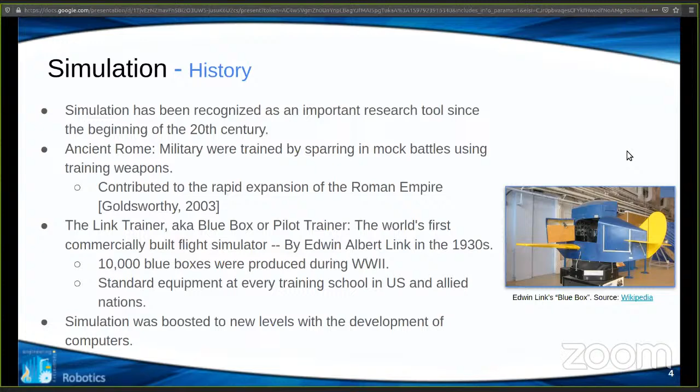Simulation was boosted to new levels with the development of computers. First the analog computers, and later the digital computers, have boosted simulation to new levels, and we will see what we can achieve with simulation nowadays.

If you want a formal definition of simulation in the context of robotics, this is one good definition: it is the process of designing a model of an actual or theoretical physical system, executing the model, and analyzing the execution output.

Simulation is very common in our lives. For example, to understand reality and all of its complexity, we try to build artificial objects and dynamically act out roles with them. I am sure all of us have come across simulation very early, namely playing a game in our youth, for example being a parent, or playing with your siblings as a doctor, fireman, etc. It's just a simulation where a child is playing a role in a virtual environment with toys.

The principle of learning is essential in simulation. Using simulation, we can learn about something in a very effective way, and while modifying rules, we can observe the effects of our interaction. Simulation opens a wide range of options for solving many problems creatively.

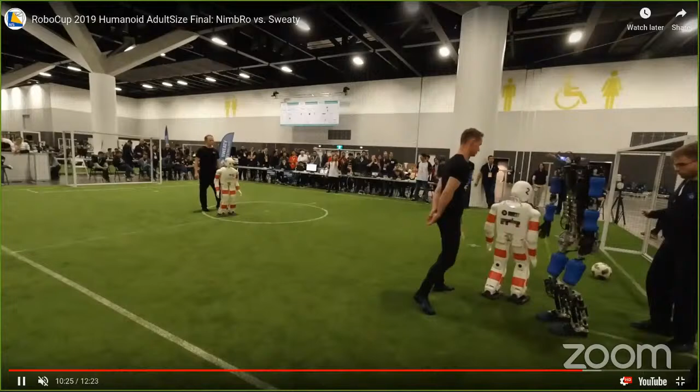The way I'm saying it seems very easy, but it is not. In reality, it's very complex, and it requires lots of things in the background. And I believe the score is for this match here. So let's take a look at this one, let's wait to see. Yeah, here we go, 7-0 for NimbRo.

Okay, so we are using humanoids in RoboCup, and I believe anybody can participate in the RoboCup competition. You just need to build a team and work together. And of course, you have to travel to the places where the RoboCup competition is held. But I'm not sure what is going to happen in 2020—maybe everything will be online or in the cloud.

Need to wait. The second section I will be talking about when it comes to robotics is mobile robotics. This is a complex research area in which many advanced technologies and open research issues are combined all together. It is often difficult to master perfectly every technology, and hence realistic simulations and fast prototyping of mobile robots help reduce the amount of time and hardware spent in developing mobile robotics applications. Moreover, simulation tools allow researchers and students to focus on the most interesting parts of their robotics projects to achieve more advanced results.

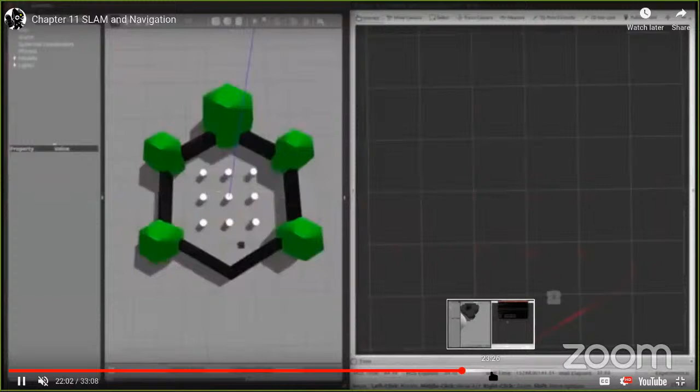For example, you can use SLAM, simultaneous localization and mapping. SLAM is a way to build a map of the environment using localization, like AMCL, and also laser data. This is done in simulation where you send a robot that is going to scan or map this area using laser data. You can see the laser data here in red.

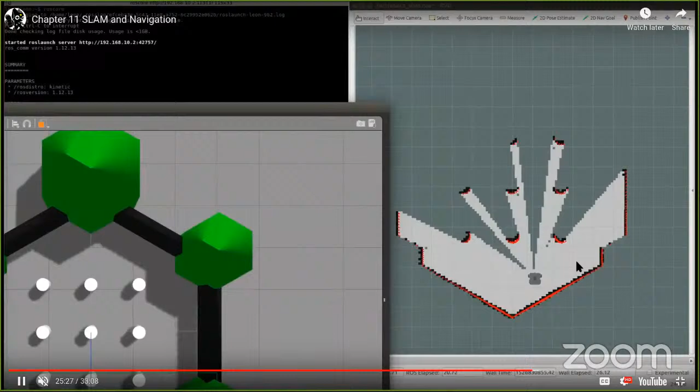I'm not sure if you'll be able to see it from where you are, but the red dots here are the laser data detecting objects. The white parts are available areas, and the black ones are obstacles, for example.

So you send a robot in an environment like this. Imagine you send a robot like this into a real environment - it will build a map of the environment. Afterwards, you can send your robot to navigate the environment to look for people. Mapping is part of the simulation, one aspect of simulation that we use a lot not only for looking for or rescuing people, but in some other areas too.

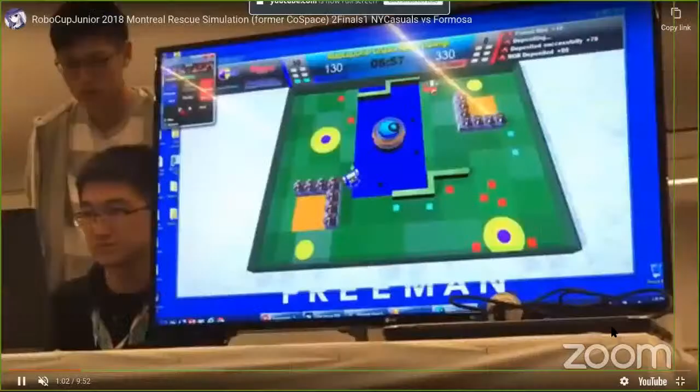This one is, I guess, a little bit more interesting for the youngsters out there. This is also the Rescue League, but it's the Junior League, I think. Again, you have to rescue people, but in a more fun way for kids to learn how to use robots and how to program robots effectively. I guess it's a little bit more attractive to the youngsters.

Okay, so the other field is medical robotics. The introduction of simulation into robotic surgery is recent and advancing quickly. This has created the need to identify systems that effectively improve these unique surgical skills.

The modeling of deformable organs - you can work on a person's heart, for example, or lungs. These are deformable organs; when you push on them, they will deform. So the modeling, planning, and simulation of robotic procedures, safe and real-time integration with augmented reality - this is also one aspect of robotics we use. All of these are key topics in the field of robot-assisted surgery.

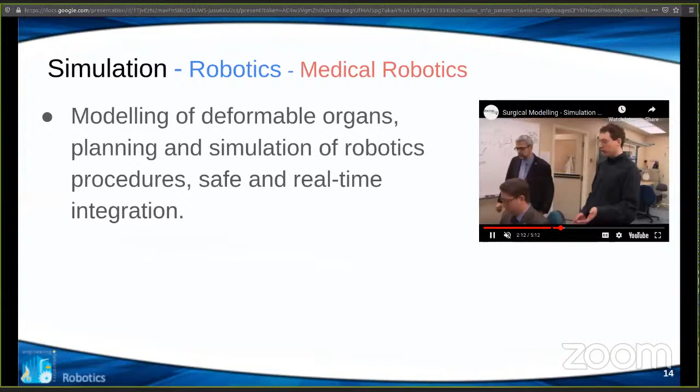Just a quick... trying to find the right spot where it shows simulation with robotics. So basically, this is a way to do something in simulation and try something new in simulation and see how it goes. And if everything works fine, you can get some data out of this and try to implement it yourself in a real situation. So robotics, or simulation, allows you to break things without actually breaking physical things. So it's fine to break things in simulation.

And of course, we have industrial robotics. Without simulation, we won't be able to do much in industrial robotics. When it's time to program an industrial robot on the production line, your robot is doing something like picking, I don't know, some boxes on the production line. The shift is over and you want to reprogram the robot to do something else, like picking up apples, instead of picking up boxes, from a conveyor belt, for example.

Well, if you want to reprogram the robot this way, you usually have to stop the production line. And this downtime can cost upwards of thousands of dollars. And this is where offline programming comes in.

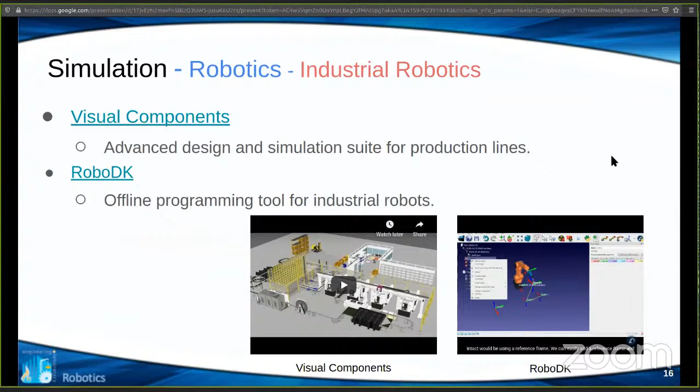And simulation is a good way to test these new languages that you are moving to your robots. At work, we have something called CRCL, the Canonical Robot Command Language, which is a tool that brings this together: you write the program in one language, and CRCL will be able to translate the language you use to the robot's language. You have to do the mapping only once, and then you can use it whenever you want. This will save time, and you can do testing in simulation as well, pretty easily.

Okay, 2 more before we move to ARIAC. I guess I'm running a little late. The next one is Robot Studio, a development suite created by ABB, and I'm not sure this is free.

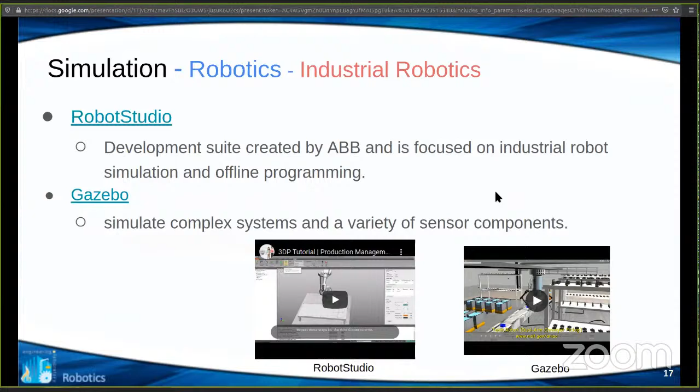The last one is Gazebo. Gazebo is the one we use in ARIAC, and we're going to move to ARIAC right now. Gazebo is free and has full integration with ROS.

All right, so we are in the second part of this presentation, and I will talk about ARIAC, which stands for Agile Robotics for Industrial Automation Competition. We usually say ARIAC competition, but it's redundant because the C in ARIAC stands for competition, but just saying ARIAC seems weird, so we say ARIAC competition anyway.

So the goal of ARIAC is to test the agility of industrial robot systems. We'll see what agility means in a minute. The goal is enabling industrial robots on the shop floor to be more productive, more autonomous, and to require less time from shop floor workers.

We were approached by small and medium manufacturers in the US who are struggling with some aspects of robotics. They need a way to test that the robot will be able to do some robotics application. They need a way to see the challenges and see if their robots can handle those challenges. I guess the best way to do this is using a competition or simulation, and this is what we did at NIST.

ARIAC is a simulation-based competition, so everybody can access this competition. It's free.

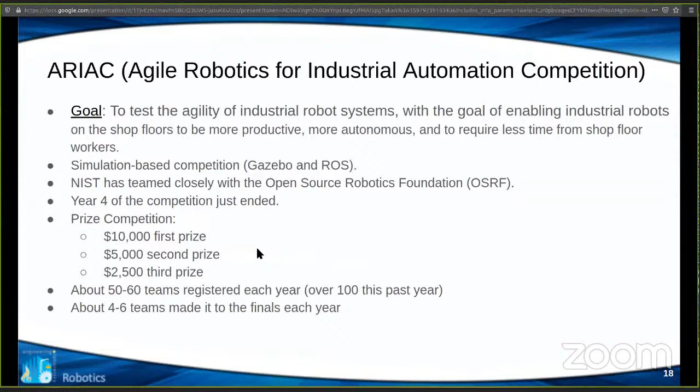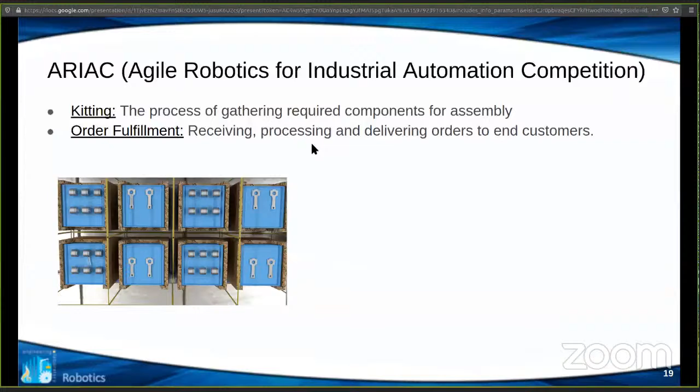ARIAC comes with agility challenges. We originally identified 30 agility challenges - things that companies struggle with in their robotic applications. There were 30 of them. We talked with industry and did literature reviews to understand all those challenges.

Then what we did is rank each challenge based upon 3 criteria. The first one is industry's perception of how critical the challenge is - you ask industry which challenges they want us to look at, which ones are very important to them. The second criteria is how difficult the challenge is based upon perceived team capabilities - that would be the people competing in ARIAC.

You should also ask them if they think it's easy to implement a solution for those challenges - you need their feedback as well. The third criterion is how difficult it is to implement in Gazebo. We need to take into account all 3 things and find a sweet spot between them, and then you can implement them in simulation.

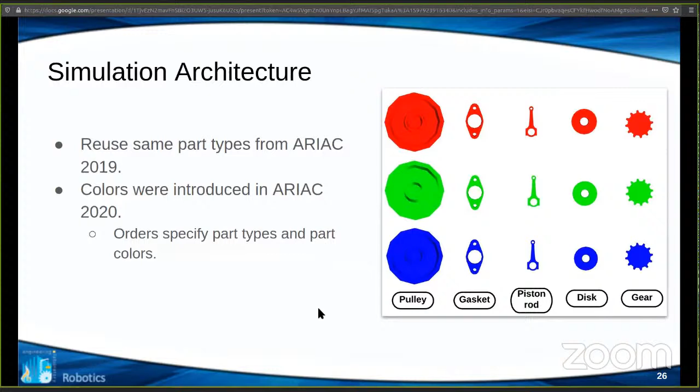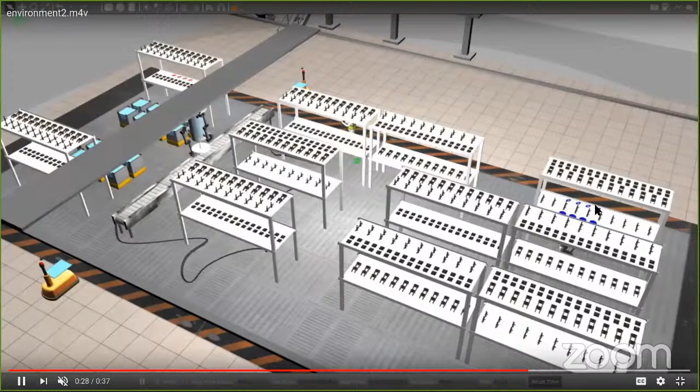If you want a quick overview of what is happening in the work cell, you have people moving, the robot is here, an AGV is here, another AGV is here, you have bins, you have shelves. I don't know if you can see here, but we have some blue parts on the shelf here and some red parts here. It's not a very beautiful environment, but it's quite complex, has many factors, many components, and you need to navigate through them.

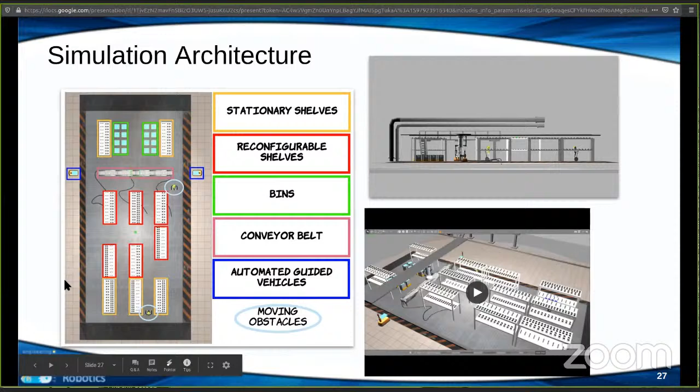The simulation architecture we use is a Gazebo environment for Agile Robotics, which we call GEAR.

We have plugins. You have a plugin to deliver tray, a plugin to control the cycle of the parts on the conveyor, for example, and control how we move parts. All the challenges are controlled by plugins.

Teams' interaction with the ARIAC server was via the GEAR interface. This is basically a ROS-based interface, so we provide ROS services and messages so you can communicate with the system. For example, you can send the AGV away when it's ready, you can query orders to know which order to build, and you can query or get information about sensors using services. All of those are available to you; you just need to know how to use them.

A quick overview of the simulation architecture. As a participant, you provide a file with the sensors to be placed in the environment, and we parse this file for you. Then we parse another file, which is basically the challenges for the competition, defining where to put parts in the environment, where people are moving, and all of this. Then everything happens on the server.

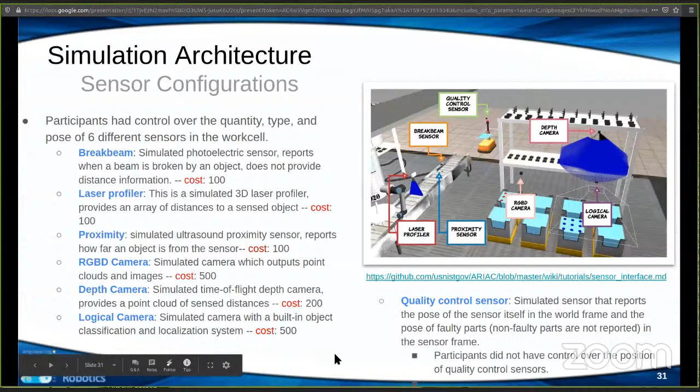This is how you would put sensors in the environment: just a text file, a YAML file, with the name of your sensor, the type of the sensor, and where you want to put it in the environment, including location and orientation. This is what you will provide to us.

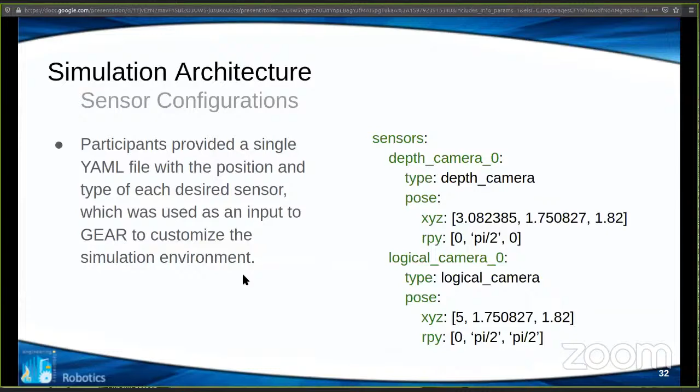Next, let's quickly talk about the robot we used in the past ARIAC. This is a 15 degrees of freedom gantry robot, quite a complex robot I'd say. We have some rails here, a small rail and a long rail, so the robot can move on those rails. There's a torso base which moves on the small rail like this.

You have a torso main which rotates around the torso base. You have a robot tray where you can put parts. You have two robotic arms mounted on this torso, and a vacuum gripper at each extremity of the robotic arms. We created this robot for only this year.

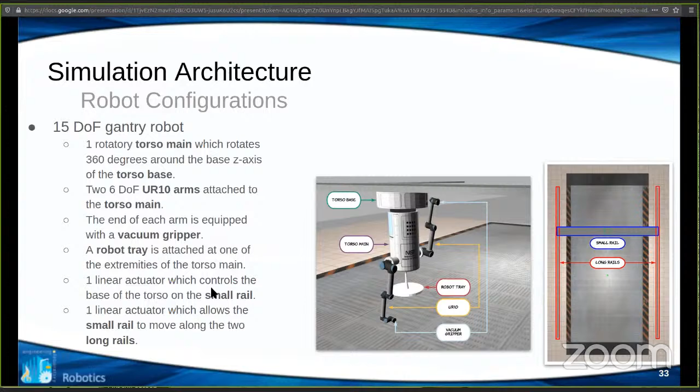Just an example of what you can use in ARIAC to control the robot: you can move the robot, control the joints, and get information about the state of the robot—basically the torso, the left arm, and the right arm. Again, all of these are provided to you; you just need to know how to use them.

Okay, so we're going to take a quick look at each challenge, and then we will finish the presentation. I won't go through all of them because I don't think I'll have enough time, but I'd like to take a look at some interesting ones.

This is one of the challenges, called faulty gripper. This is a simulation, so you can simulate anything. In this case, we're going to simulate a gripper becoming faulty at specific locations.

We usually do this above the AGV. There's a robot here with a part in its hand, and it's going to place this part in the tray. However, we're going to simulate a faulty gripper, meaning the part will be dropped before it reaches its destination. We're going to drop this part on purpose in the tray in the wrong spot.

So the team system will have to reposition the dropped part or use another part in the work cell. Let me see if I can run this.

I'm going to pause here. The part is here, the blue part, and the robot is going to put the part somewhere in here. You will see the part being dropped like this right here. All right, so we kind of dropped it here.

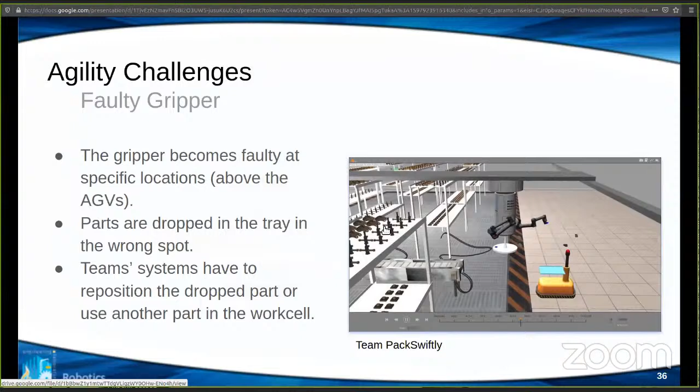Okay, faulty part, I will not go through this one. Faulty part is basically, this part here is faulty, that is, it has some faults and it needs to be removed. You should never put a faulty part in a tray and deliver it. So basically, you get rid of this part and go back in the environment to find a new one.

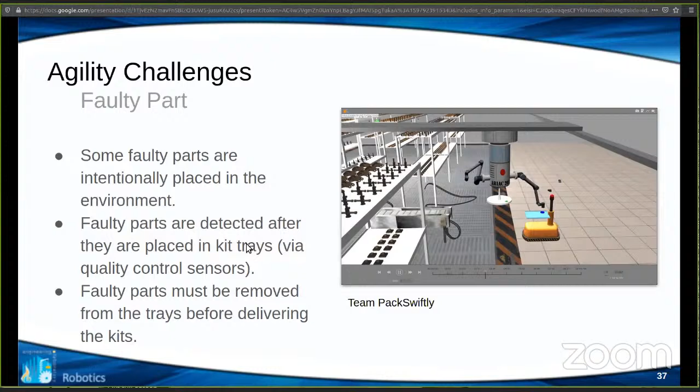I'm not going to run it because if I run this, it looks like it's going to kick me out of Zoom, but those slides will be shared with you.

The other one is called sensor blackout, so all sensors stop working. Again, this is simulation, you can decide when to stop sensors from working and which sensors stop working. All the sensors will stop reporting data, meaning your robot will have to work blindly or with recorded data, not live data.

So the idea is to keep the robot working while the sensor blackout is happening. All the sensors will stop working, and after a while, they will come back live.

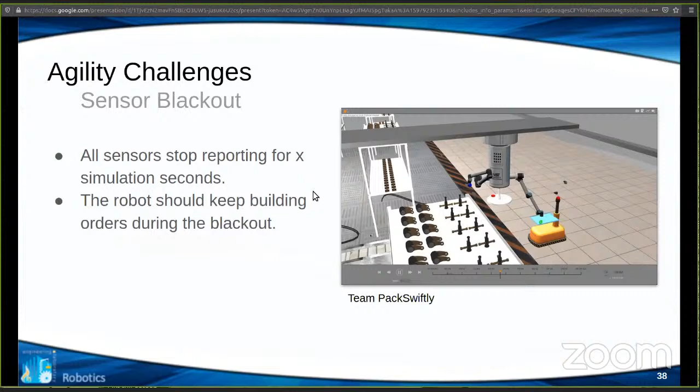Part flipping, some parts need to be flipped. I will try to show you this video here. This is how you flip a part. We usually ask you to flip this big guy here, which is a pulley part.

The roll of the part is not correct, so you have to flip it if you want to get full points.

All right, so you have a high priority order, and I will focus on this one before I finish here. Let me try to go into presentation mode.

Okay, I'll be back, it looks like I was kicked out again. Let me try to connect. Okay, should be able to see it now.

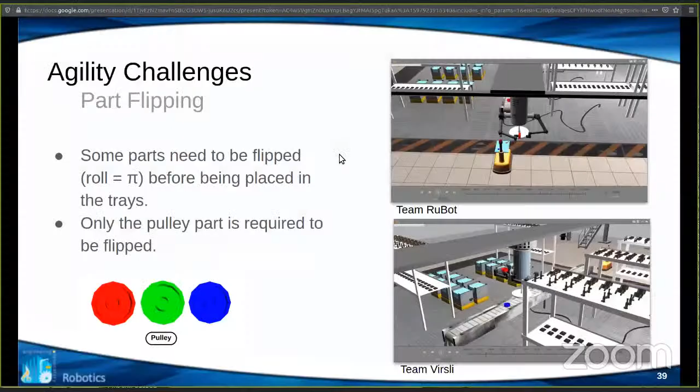So the last one, which we implemented this year, is called moving obstacles. Some scenarios include human workers going back and forth in a straight line between aisles. The workers will pause for a brief moment when reaching each extremity before moving again. The participant system is aware of the possible locations. There are 4 possible locations, but they do not know where those obstacles will be spawned in the environment. The travel time and idle time for moving workers are not communicated to participants.

Colliding with a moving obstacle sets the final score for the current trial to 0. You do not want to collide with any of those moving obstacles.

So the idea here is to spawn 2 people in the environment. They will either move in this aisle or that aisle, so you have 4 possibilities. People do not know where they're going to be spawned in the environment. It can be one of these four, we don't know which one.

We increase the level of complexity by adding some parts here. The robot is here, this is the top view. It will need to come here and pick up some parts, while avoiding this guy and this guy. Otherwise, you will get a 0 if you collide.

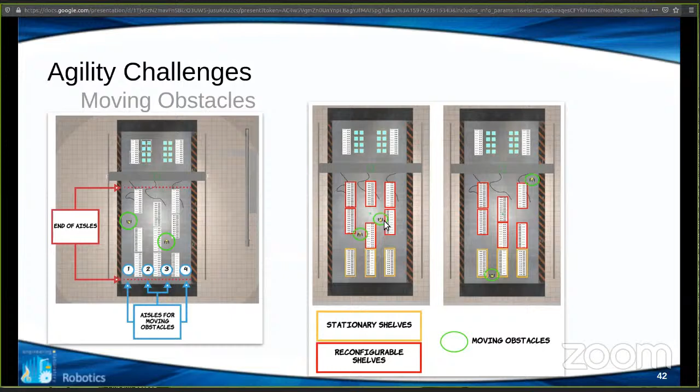This is another configuration. One is moving in this aisle, one is moving in this aisle, aisle 2 and 3, and aisle 2 and 4. You do not know beforehand where they're going to show up. So this one here is from Team RuBot.

This robot needs to pick up this part here. The only possibility is to go into this aisle, but there's a moving obstacle here, like a person, so it needs to be very careful not to collide. Otherwise, you will get a 0. I'm not sure if it's a fluke or intentional, but it managed to grasp this part without colliding with the person.

The other one is from Team Virsli. I will see if I can open this from here. Let me try this. Okay.

So I sped up the video a little bit. No, this is not the moving obstacle, is it? This is another example of a dropped part, you see? Yes, it looks like I didn't open the right video, but that's fine. I wanted to open this one. Let me take another look.

Right, yes, so I'm going to pause here. This robot needs to pick one of those parts. There is a moving obstacle in this aisle, so the robot does not want to go in there, as you have a big risk of colliding with people. However, you can reach those parts from this side of the shelf, and this is exactly what this team is doing. No need to go in the aisle. When you're done, you place the part in the tray.